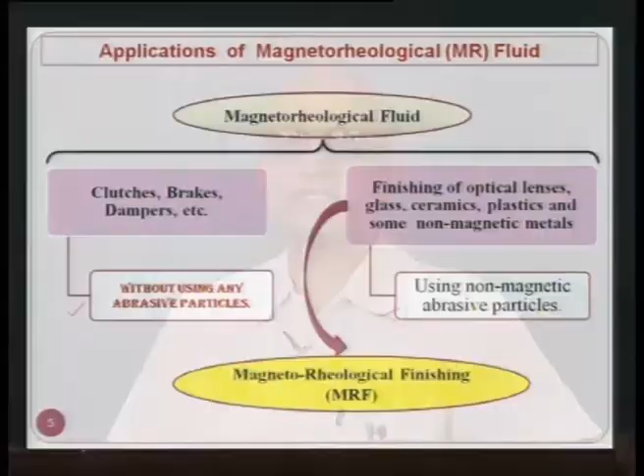The important point to note here is that the fluid does not contain any abrasive particles, but on the right hand side, if you see, this magnetorheological fluid is used for finishing of optical lenses, glass, ceramics, plastics and some non-magnetic metals. Now, important point here to note is that this fluid is using non-magnetic abrasive particles. These particles include alumina Al2O3, silicon carbide SiC, it can be diamond particles also.

But in this particular talk we are going to discuss the application of magnetorheological fluid in the field of finishing, and this process when using magnetorheological fluid along with the abrasive particles, we call it as magnetorheological polishing fluid or MR polishing fluid also. And in this talk I am going to discuss only magnetorheological finishing process, which uses MR polishing fluid as the tool.

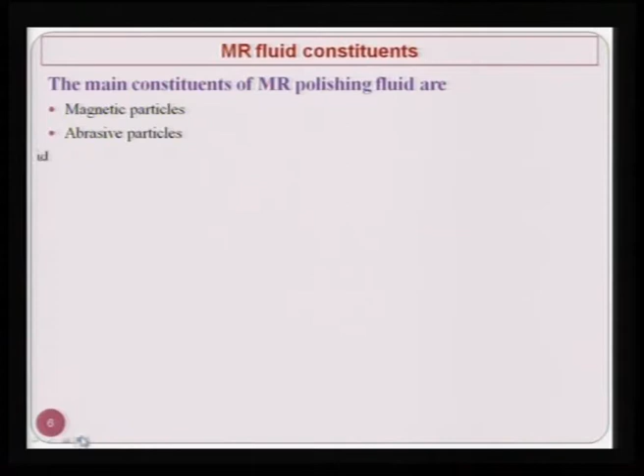The major constituent of any MR polishing fluid is the carrier fluid, and it makes a lot of difference as long as performance of the finishing process is concerned. In case of certain workpiece materials, it is always recommended to use water as the carrier fluid, while in some other cases oil is recommended as the carrier fluid. Now, when you are mixing up magnetic particles and abrasive particles in the carrier fluid, these magnetic particles and abrasive particles will settle down at the bottom because they have higher density compared to the carrier fluid. So, we need what is known as stabilizer, and there are various kinds of stabilizers which are used in magnetorheological polishing fluid. It may be glycerol, grease, oleic acid or xanthan gum. One of these is used depending upon the requirement.

Essential features of MR fluid for magnetorheological finishing process: optimum concentration of magnetic particles and abrasive particles is very important. If the percentage of these two constituents is very high, then definitely the efficiency of the finishing process is going to go down. High yield stress under magnetic field. Here we are applying the magnetic field and the fluid is always subjected to the magnetic field. So, whatever are the properties of MR polishing fluid without the application of magnetic field and with the application of magnetic field are going to be very different from each other.

Low off-state viscosity means the viscosity of the fluid without the application of the magnetic field. Less agglomeration and good redispersibility should be there. The particles should not get agglomerated, otherwise they are going to affect the performance and quality of finishing. And once the magnetic field is no more, then the particles should get dispersed quickly.

And resistance to corrosion, static sedimentation stability, that is the resistance of fluid to forming hard sediment that is difficult to redisperse. That is what I mentioned earlier, that in static conditions they should be stable. That means sedimentation should not take place, otherwise the properties of the fluid are going to change and that will not give the proper finishing.

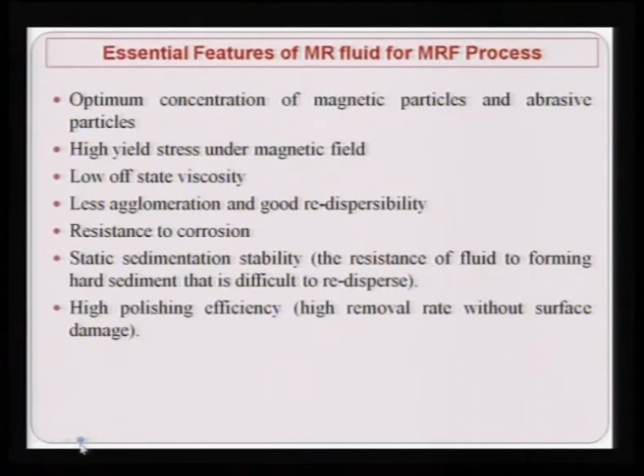High polishing efficiency, that is high removal rate without surface damage. Apart from high material removal rate, we as manufacturing engineers are always concerned with high finishing rate, because in finishing processes, finishing rate is more important than material removal rate. The objective is to achieve the desired surface finish without any defect in the lowest possible time, not to remove a large amount of material, but to achieve the desired surface finish in minimum possible finishing time.

Magnetic particles. Main functions of magnetic particles in the fluid are to form dense chain structure under magnetic field and to hold abrasive particles during the finishing process. This is very important - once the abrasive particles are held by the magnetic particle chains, this acts something like a very soft grinding wheel, in which the bonding material holds the abrasive particle and finishing is done. But once the fluid is out of the magnetic field zone, it will shatter and convert into an easily flowing liquid.

You can see here in the figure there is no magnetic field. White color indicates the alumina, and blackish color indicates the iron particles or carbonyl iron particles, and they are uniformly distributed across the fluid.

But when you apply the magnetic field, the same fluid with the same distribution of iron, abrasive particles, carrier fluid and stabilizer forms chains, as you can see on the right hand side. The abrasive particles are held either within the chains or between the chains, and when there is relative motion between these abrasive particles in the chains and the workpiece surface, the abrasive particles act as a tool and remove material from the peaks of the workpiece surface - that is how you keep getting a better and better surface finish.

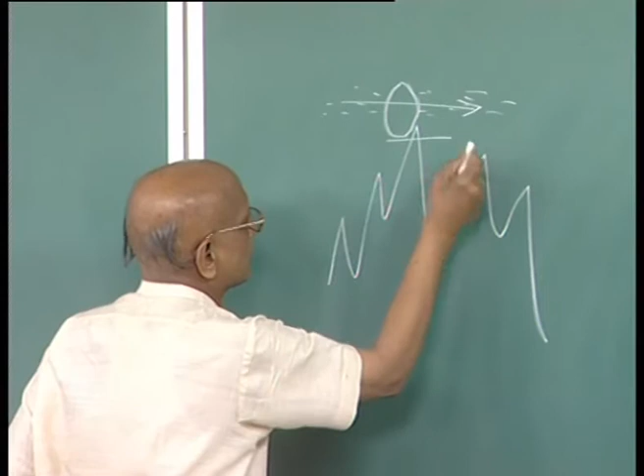I'll show you something like this - this is the abrasive particle which is being held by the fluid chain. There is the chain of iron particles, and this chain is being pushed in this particular direction due to the rotation of the wheel. Then this peak will get removed like this, and the RA value, RMS value will keep decreasing.

Many types of magnetic particles are available for MR fluid preparation. As I mentioned earlier, you can use carbonyl iron particles, although carbonyl iron particles are very expensive, electrolytic iron powder, iron cobalt alloy powder, etc.

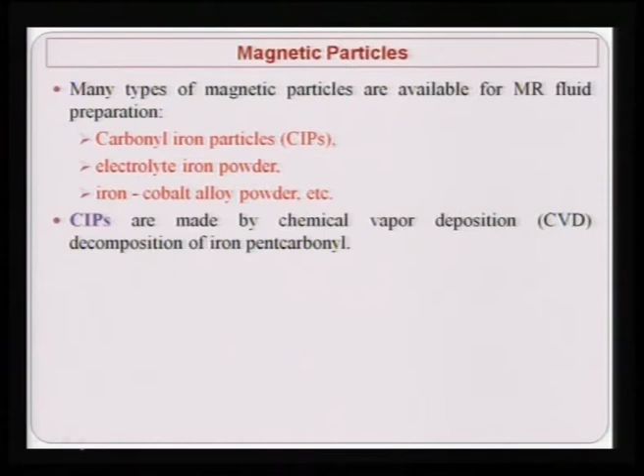CIPs are made by chemical vapor deposition decomposition of iron pentacarbonyl, while electrolytic iron powder is prepared using the electrolytic or spray atomization process. CIPs are more preferable compared to others because they are magnetically soft, chemically pure, and have high saturation magnetization - that is 2.1 Tesla at room temperature, which is really a very high value of saturation compared to the saturation value for any other iron or magnetic particle.

Abrasive particles are non-magnetic materials in MR fluid responsible for material removal, as I mentioned earlier - these are the particles which really remove material from the workpiece, while chains of iron or carbonyl iron particles just act as the bonding material in the grinding wheel, holding these abrasive particles. When there is relative motion between the abrasive particle and the workpiece surface, material is removed in the form of microchips or nanochips depending upon the finishing conditions.

Important parameters are granularity and hardness of these abrasive particles, which make the difference as far as finishing rate is concerned. Commonly used abrasive particles are alumina Al2O3, silicon carbide SiC, cerium oxide CeO2, and diamond powder. Other abrasive particles can also be used depending upon their availability, cost, and the requirement of the process.

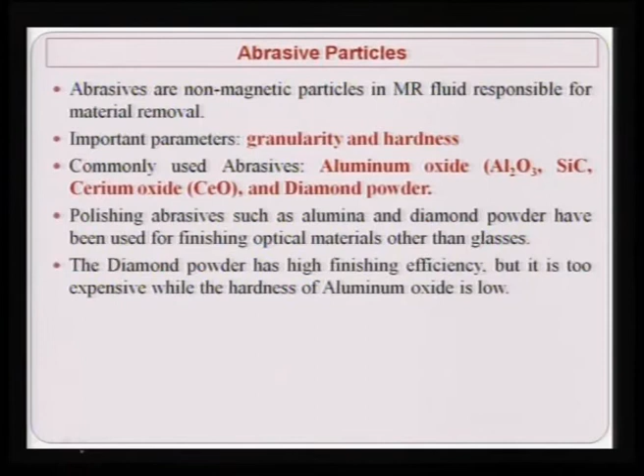Polishing abrasives such as alumina and diamond powder have been used for finishing optical materials other than glasses. Diamond powder has high finishing efficiency, but it is too expensive, while the hardness of aluminum oxide is low. So diamond particles can be used, but they are quite expensive. So one has to see the application, then only diamond should be used as the abrasive particle for finishing purposes.

However, the most commonly used polishing abrasive and carrier liquid combination for magnetic field assisted finishing of all optical glasses, including many crystals, is cerium oxide and water respectively.

The function of the carrier fluid is primarily to provide a medium in which the solid particles like carbonyl iron particles and abrasive particles are suspended.

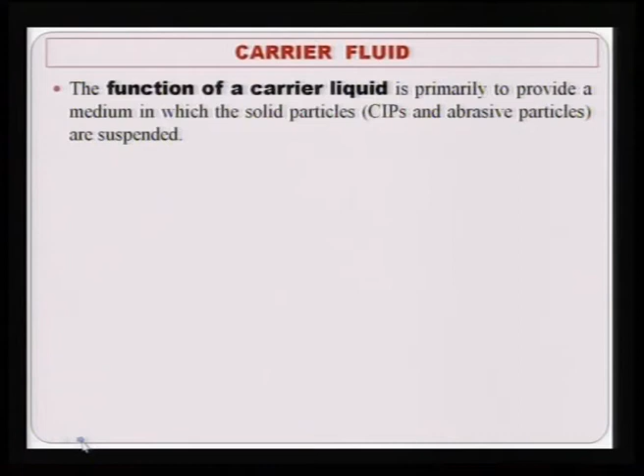The off-state viscosity of MR fluid should be as low as possible, so that it can easily reach areas difficult to reach, because wherever this fluid reaches and wherever there is relative motion between the abrasive particle and the workpiece surface, finishing will take place only in those areas. If the fluid is not able to reach those difficult areas, then no finishing will take place, and you will not get the appropriate finished area as desired.

Important properties of carrier fluid are: it should be non-corrosive with magnetic particles, that is carbonyl iron particles or iron particles, abrasive particles like alumina, silicon carbide, diamond, etc., as well as the components used in the device, that is the machine or MRF machine components material.

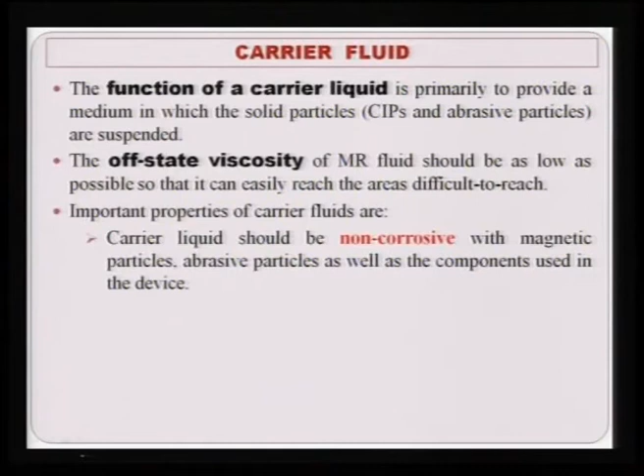Carrier liquid should have high boiling temperature and low freezing point, because heat is generated to some extent, and the carrier fluid should not start boiling, otherwise it will not be able to serve its purpose properly. It should have a low freezing point because in many locations the environmental temperature is low, it should not freeze, otherwise it will not serve the function for which the fluid is to be used.

Carrier liquid should not show significant variation in viscosity with temperature. As the temperature changes, the viscosity of the carrier fluid should not change substantially, otherwise it will not remain in the designed parameter condition, and if it does not remain in the designed parameter condition, then you are not going to get the desired finishing rate and final surface roughness value.

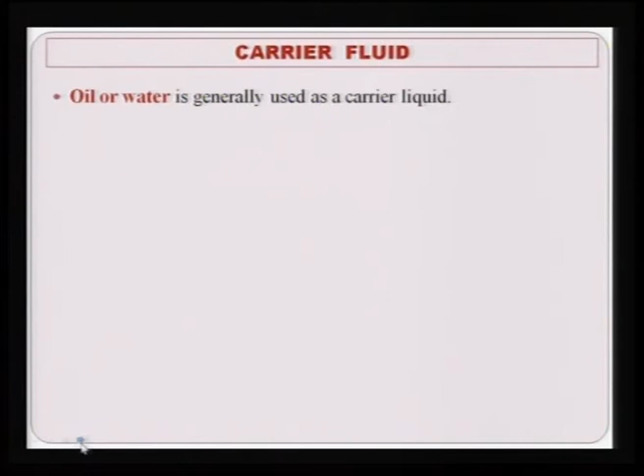Oil or water is generally used as a carrier fluid. Oil-based carrier liquid has high viscosity, so MR fluid has good performance in stability and sedimentation. This simply means that solid particles will not be able to sediment or settle down so easily, because oil has higher viscosity compared to water.

While considering rheological property, water-based MR fluid has high yield stress compared to oil-based liquid. Moreover, water has hydroxylation to glass for improving finishing efficiency. In addition, water imparts cooling during finishing, and the cooling rate in case of water is higher compared to oil.

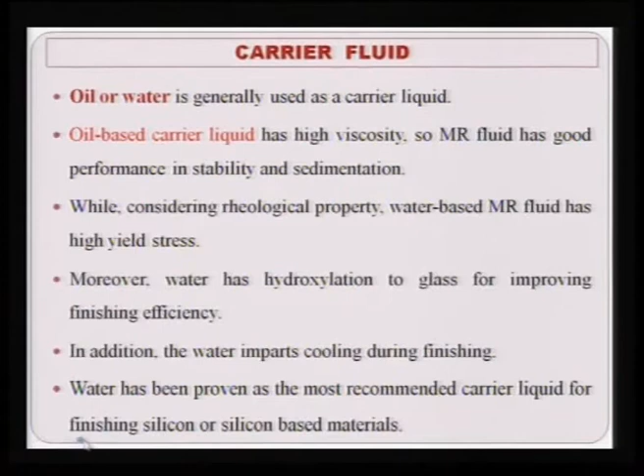Water has been proven as the most recommended carrier liquid for finishing silicon or silicon based materials. Invariably water is used for silicon or silicon based materials for finishing purposes, because it chemically reacts and is able to easily finish ceramics or ceramics based materials with comparatively soft abrasive particles.

Stabilizers: the stabilizer is used to disperse the magnetic particles and abrasive particles uniformly in suspension and to retard oxidation of the magnetic particles and prevent agglomeration, as I have emphasized earlier, so that they do not permit the solid constituents of the MR polishing fluid, that is CIP or carbonyl iron particles and abrasive particles, to clump.

Commonly used stabilizers are glycerol or grease. Stabilizers create a coating on the particles so that MR fluid can easily redisperse. This means the stabilizer tries to minimize the agglomeration of these solid particles or powder so that they can be easily dispersed in the fluid.

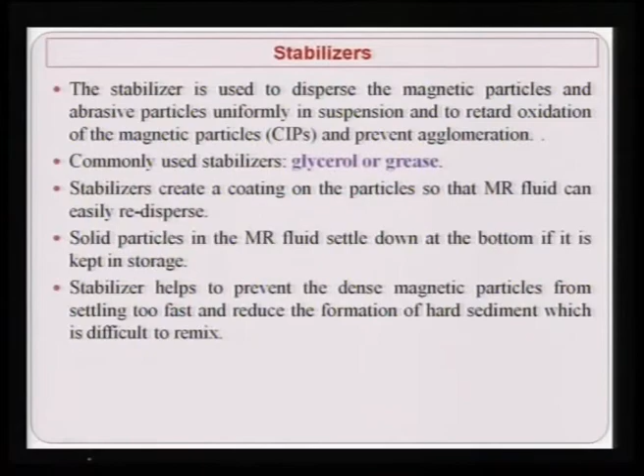Solid particles in the MR fluid settle down at the bottom if kept in storage. The stabilizer has to prevent the dense magnetic particles from settling too fast and reduce the formation of hard sediment, which is difficult to remix, because we do not want hard sediment to form from the magnetic or non-magnetic particles. Otherwise, mixing becomes very difficult, and one should be very careful before using this MR polishing fluid.

It should be properly mixed for a good amount of time, otherwise the performance of the MR polishing will not be as desired. Moreover, the stabilizing agents are also used to impart durability and corrosion resistance.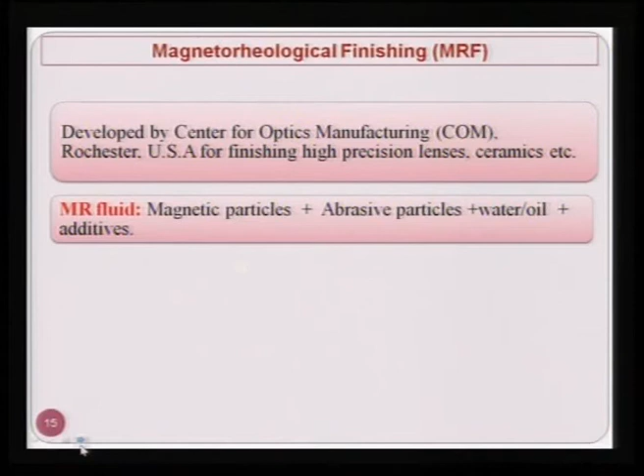MR fluid consists, as I have already mentioned, magnetic particles, abrasive particles, water or oil as the carrier fluid, and additives, specifically the stabilizers. Stiffness of the MR fluid is a function of the magnetic field strength. Higher the field strength, stronger is the chain being formed by the magnetic particles, and the abrasive particles will be held more strongly compared to the case when the magnetic field strength is lower.

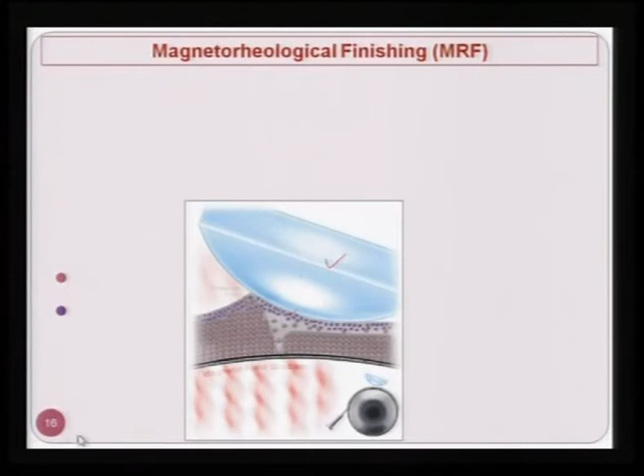If you see this figure, it clearly indicates what is happening on the right side. Here there is the electromagnet and the MR fluid conditioner, and a pump. This pump is pumping the MR polishing fluid to the nozzle. From the nozzle the fluid is being dispersed on the wheel. This is the wheel which is rotating in this particular direction, and this fluid is coming onto it, with the electromagnet providing the magnetic field.

So this fluid forms a ribbon kind of structure on the rotating wheel, and when it comes to the other end there is a suction, and through suction the pump takes in the fluid and it comes to the MR fluid conditioner. In this conditioner you can add some of the constituents of the MR polishing fluid as per requirements.

Now, this is the lens, this lens is rotating and you can move it in one direction as well as another, so that the whole surface of this lens is finished, and you can also rotate the lens at its own axis. The same thing is shown on the left hand side in the figure.

Fluid is extruded onto a rotating wheel in a thin ribbon that contacts the optical surface. You can clearly see here, this is the fluid, and a thin layer is there between the lens and the wheel, being extruded in this particular direction. Because of this, normal force as well as tangential force act on the workpiece surface through the abrasive particles, which remove the material.

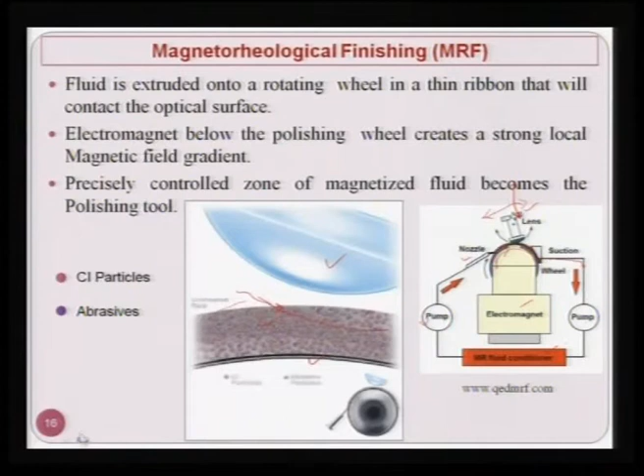Now, lapping and chemical mechanical polishing, we know these are very good processes extensively used in the computer industry, especially for computer components, and they give very good surface finish, but the rejection rate is quite large in case of CMP. As you can see here, the load is acting, here is the pad, and here is the abrasive particle which is finishing the workpiece surface. In this case, an abrasive particle is embedded in the rigid pad which supports the particle load.

The normal force, somewhere around 0.01 Newton, is significant enough to cause surface indentation and scratching, meaning it damages the surface of the workpiece. Although the normal force looks quite low, the size of the abrasive particle is also very low, being micron sized, so the stresses acting on the workpiece surface are quite large, and this leads to damage to the surface of the workpiece. That is why the rejection rate in case of CMP is quite high.

But if you see the MR polishing phenomena, here the workpiece is in contact with the abrasive particles, but the abrasive particle is not in contact with any solid support; rather it is part of the MR fluid, and the force being applied on the abrasive particle is through hydrostatic pressure and magnetic buoyant force.

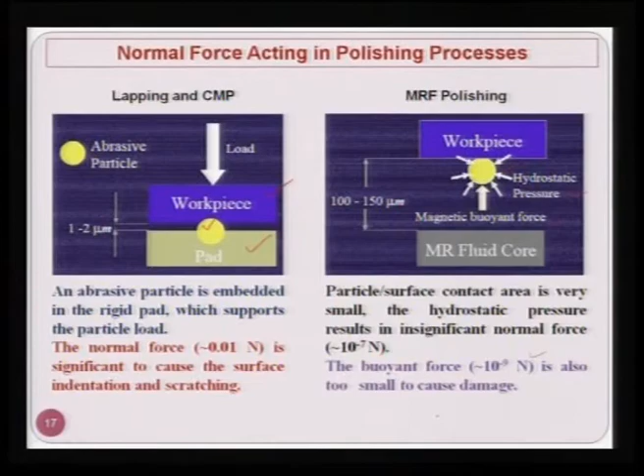So, there is a significant difference in the magnitude of the force acting on the workpiece surface through the abrasive particles. The buoyant force, which is another constituent of the normal force in the MR finishing process, or magnetorheological fluid polishing process, is 10 raised to minus 9, which is still smaller than the hydrostatic pressure, and is also too small to cause damage. That is why in the magnetorheological finishing process, the workpiece surface damage is more or less absent, and it is reasonably high in chemo-mechanical polishing as well as lapping processes, which is quite evident from this particular slide.

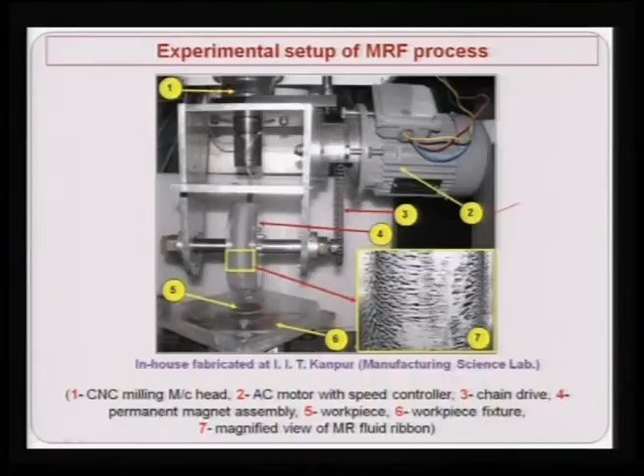Five is the workpiece that is shown over here, six is the workpiece fixture, and seven is the magnified view of the MR fluid ribbon. The ribbon that is being formed over here is magnified, and as you can see here, these are the brushes. These brushes are being formed, and their strength depends upon the magnetic field strength, and these brushes have abrasive particles outside, as we have seen in the video film. When these abrasive particles come in contact with the workpiece surface over here, they remove the peaks one by one, and the finishing keeps on improving, and you can easily get a surface finish of less than 10 nanometer in this particular case.

How the forces are acting, as you can see over here, the fluid flow direction is shown in this particular direction, and the magnetic field direction is in this particular direction. Now, as I mentioned earlier, two types of forces are acting on the abrasive particle, that is the yellow color here. One is the normal force and another is the tangential or axial force. Now, this is the peak of the workpiece surface. The normal force is responsible for the penetration of the abrasive particle into the workpiece surface, and the tangential force is responsible for removing the material from the workpiece surface in the form of a microchip. So, you can see here, this is the size of the microchip going to be removed, and the size of this microchip will depend upon the normal force acting, and if the tangential force is sufficient to remove that indented material, then it is going to give you the chip.

Two types of forces act in the MRF process, as I have just explained to you. One is the normal force Fn, and this is due to the squeezing of the MR fluid through the converging gap, and the magnetic levitation force due to the magnetic particles. The other is the tangential force. This force is due to the rotation of the carrier wheel. Process parameters of the MRF process.

Now, before I proceed, let me explain what the squeezing force is. In the case of the MRF process, you have seen that there is a wheel which carries a ribbon, and this ribbon is nothing but the MR polishing fluid consisting of abrasive particles and iron particles. If you see the enlarged view of this, as you have seen in the video film, it is like this. These are the abrasive particles, while all the others are the magnetic particles over there, and these abrasive particles are going to come in contact with the workpiece surface.

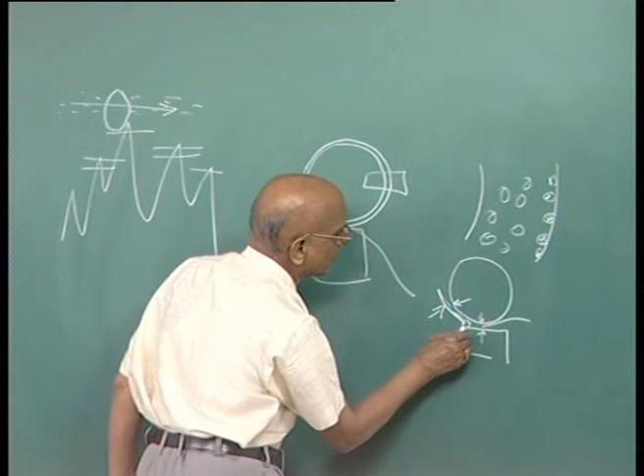Now, if you see the enlarged view of this, it is like this. This is the wheel, this is the workpiece surface, and when this is there, then what happens is that this thickness is greater than the thickness over here. So, this squeezing will take place, the fluid will be squeezed all over here, and then it will be moving like this. When this squeezing takes place over here, it creates additional normal force on the abrasive particles. Process parameters of the magnetorheological finishing process.

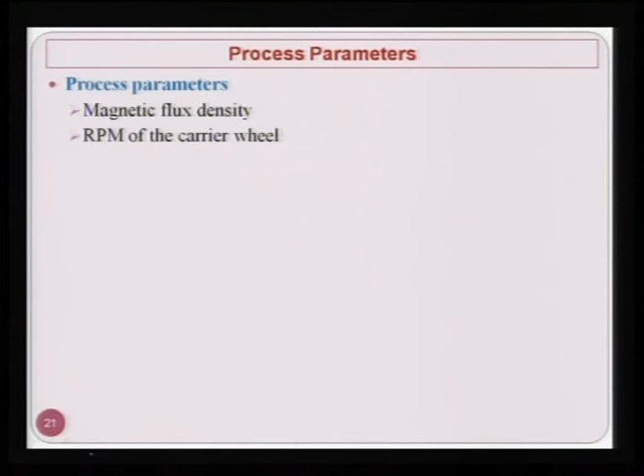Magnetic flux density is one of the very important process parameters. RPM, revolutions per minute of the carrier wheel, or indirectly the surface speed of the carrier wheel, makes the difference. Flow rate of the MR fluid, volume fraction of the carbonyl iron particles and abrasive particles, size of the carbonyl iron particles and abrasive particles, feed rate of the workpiece, that decides the relative velocity between the abrasive particle and the workpiece.

And type of the workpiece material. Now, there are certain parameters which depend on these finishing parameters, and these parameters include material removal rate, or these are also known as responses, which are going to decide the performance of the finishing process.

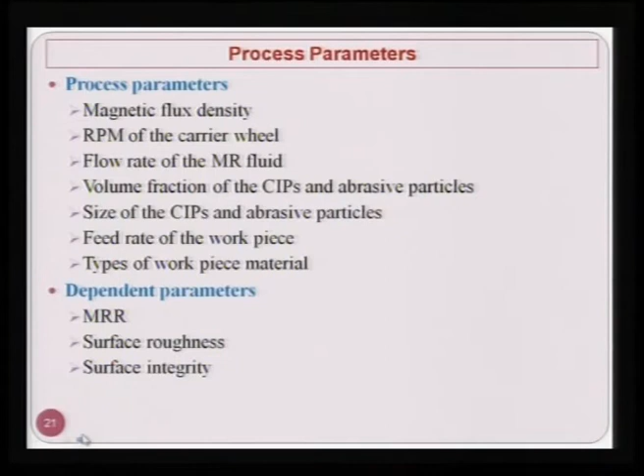Surface roughness, surface integrity, and one thing which I will like to mention here, apart from this, quite important, is the finishing rate in this particular case, and this finishing rate will have the unit as the removal of this peak in terms of micrometer or nanometer per unit time. So, it can have micrometer per second or nanometer per second.

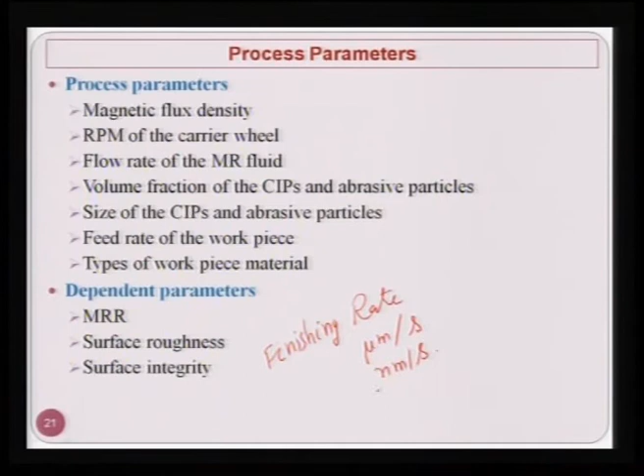Now, what is the effect of abrasive particles? Concentration of abrasive particles significantly changes the finishing mechanism. At low concentration of abrasive particles, you can see here particles are dispersed at different locations.

Some of the locations are without abrasive particles, some of the locations are with abrasive particles, and material will be removed by these abrasive particles only and not by the carbonyl iron particles. A few abrasives are trapped in the CIP chain structure, less discontinuous chains of CIPs are formed. Hence, CIP chains are capable to grip abrasive particles firmly during finishing process.

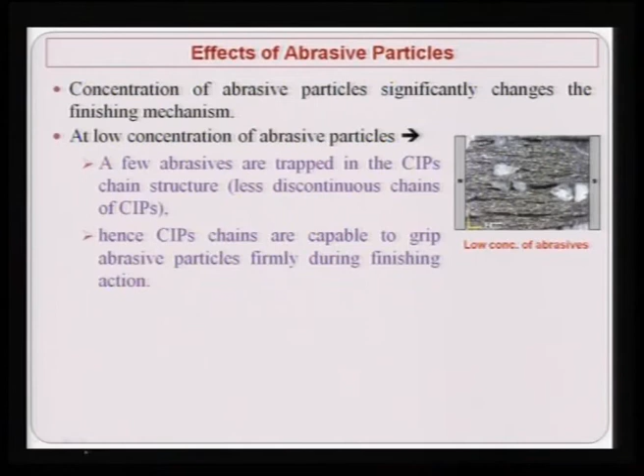Now, when you have high concentration of abrasive particles, you can see the picture over here. So many abrasive particles get agglomerated and they are at one particular location, and this feature, if it is too high, may not be desirable, because this may lead to deep scratches and non-uniform finishing along the surface of the workpiece. At higher abrasive particle concentration, more amount of abrasives are entangled in between CIP chains, as you can see over here, and they reduce the strength of the fluid under shear flow.

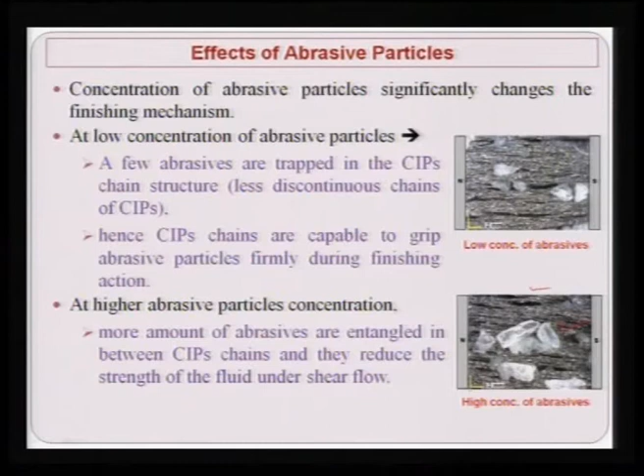Concentration of solid particles. It is also observed that total solid particles, that is magnetic particles and abrasive particles, concentration should not exceed 45 to 50% by volume in MR fluid.

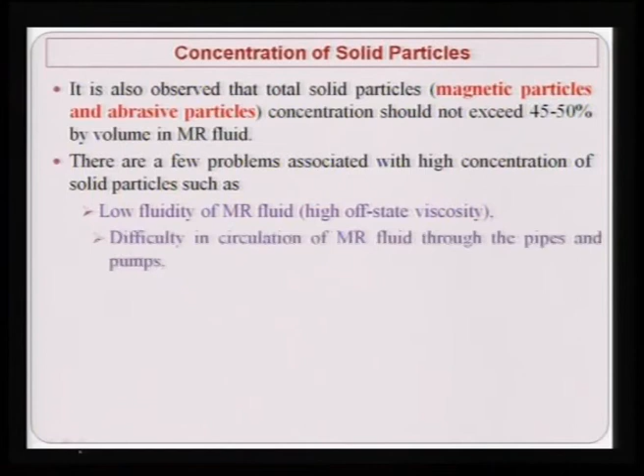There are a few problems associated with high concentration of solid particles, such as low fluidity of MR fluid, high off state viscosity, and if high off state viscosity is there, it will not be able to reach difficult to reach areas, and you may not get proper finishing, especially in case of complex shaped component. Difficulty in circulation of MR fluid through the pipes and pumps. Difficult to remix the MR fluid because low dispersibility is there.

Now, what is the effect of working gap? That is the gap between the lowermost level of the ribbon and the surface of the workpiece, that is known as working gap, as you can see over here. Suppose this is the wheel and say this is the ribbon and here is the workpiece. Then the gap between the lowermost part of the ribbon and the top surface of the workpiece or the surface which is being finished, that is known as working gap.

Now, you can see here in this particular figure the distance from the center of the magnet. Suppose this here is the magnet. So, this is the center of the magnet, then on one side it is negative, left side it is negative, right side it is positive. So, it shows distance from the center of the magnet and magnetic flux density. You can clearly see that as the distance is increasing, the magnetic flux density is decreasing, which is obvious. So, it shows variation of magnetic flux density in the working gap, and y is the working gap in millimeter, and that is this particular y axis.

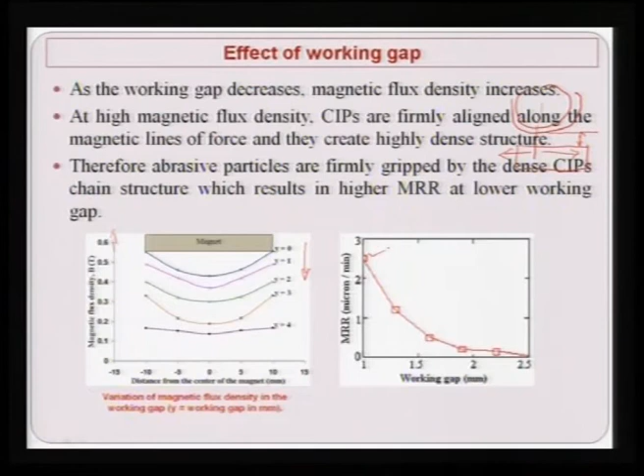As the working gap decreases, magnetic flux density increases, as shown here. At high magnetic flux density, the CIPs are firmly aligned along the magnetic lines of force, and they create a highly dense structure. Therefore, abrasive particles are firmly gripped by the dense CIP chain structure, which results in higher MRR at lower working gap, as seen at the top or left side of the figure on the right.

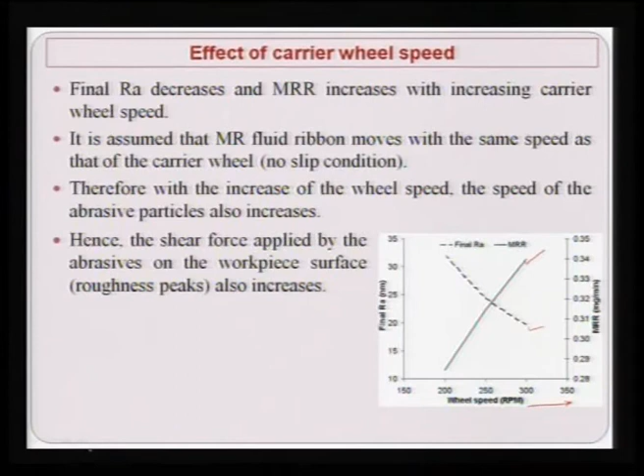It is assumed that the MR fluid ribbon moves at the same speed as the carrier wheel, that is, there is no slip condition between the wheel and the fluid ribbon. Therefore, with increase of wheel speed, the speed of the abrasive particles also increases. Hence, the shear force applied by the abrasives on the workpiece surface also increases.

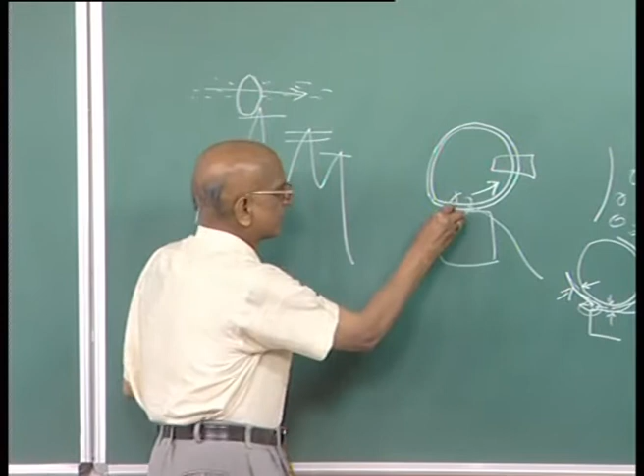As the RPM of the wheel increases, the surface speed of the wheel's outer periphery increases, and if the surface speed of the outer periphery increases, then whatever abrasive particle is there, its speed with respect to the workpiece will also increase. This is very similar to a higher cutting speed in conventional metal cutting, and that is why you get a higher material removal rate.

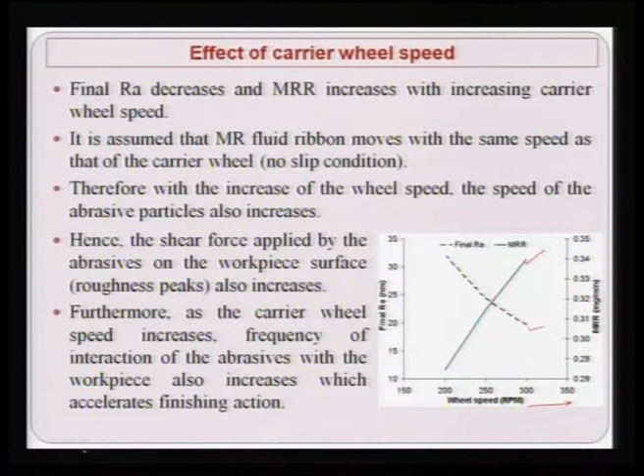Furthermore, as the carrier wheel speed increases, the frequency of interaction of the abrasive with the workpiece also increases, which accelerates the finishing action, which is very simple to understand.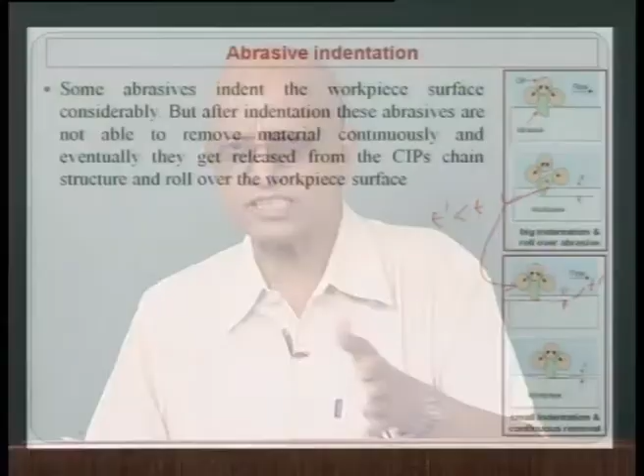If you compare this point to this one, the depth of penetration has decreased compared to the earlier case, T. This becomes the depth of penetration T dash, which is smaller than T. Since T dash has decreased, the total tangential force required to remove material in the form of a microchip will be reduced, and once this becomes equal to, or the force applied by the fluid on the abrasive particle becomes greater than, the resistance of the workpiece material to remove thickness T dash, then finishing will start. As seen in the last figure, this is able to remove a smaller depth of workpiece material.

In case of shallow indentation, less force is required to remove material, so abrasives continuously remove material, as seen in the last figure on the right. For the finishing process, a small depth of indentation is favorable to reduce or avoid deep scratches on the final finished surface, as compared to high depth of indentation shown in figure 1 on the right. So it is always desirable to have a smaller depth of indentation, meaning a smaller force compared to the larger normal force.

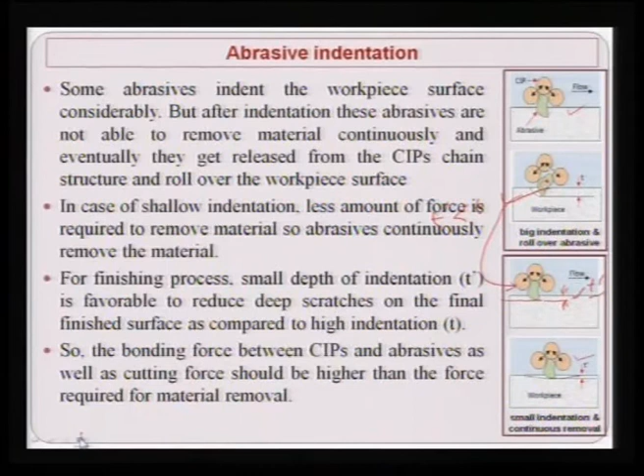Now let us see some of the applications of the magnetorheological finishing process.

This is the surface which was obtained initially, silicon single crystal, and you can see the surface finish was 1.26 micron, with peaks and valleys in the top surface. Then this was finished by the MRF process developed here, and the final surface finish achieved is 8 nanometers.

You can see the difference between the surf analyzer plots over here and here. This clearly indicates very good surface finish after the MRF process, and this can be clearly seen by the AFM plots as well.

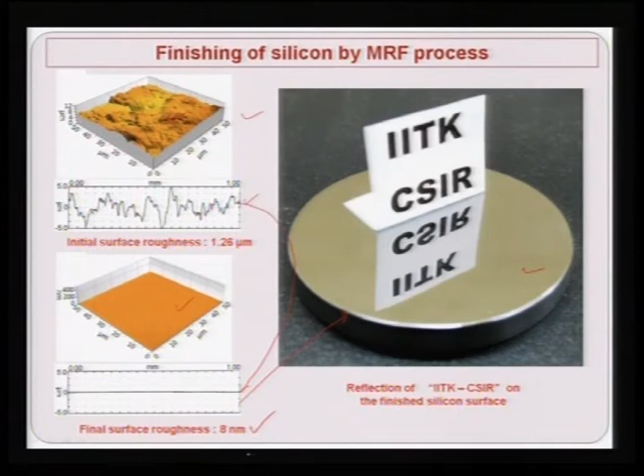Just to demonstrate it, this is the finished surface with 8 nanometer surface finish, and we wrote on a piece of paper 'IITK CSIR', and you can clearly see the reflection of these letters on the finished silicon surface.

Here, MRF quilt pattern removal: you can see the initial surface before finishing and the difference between this surface and the finished surface. Flatness is clearly visible. RMS values are also very different: here 1070 nanometer RMS, while in the finished surface it is only 17 nanometer.

Another example, silicon sphere overall figure improvement, can be clearly seen here. This is the initial surface and this is the final surface. The flatness is very clearly visible, and the RMS value has come down from 120.8 nanometer to 10.87 nanometer in 135 minutes, that is approximately 2 hours.

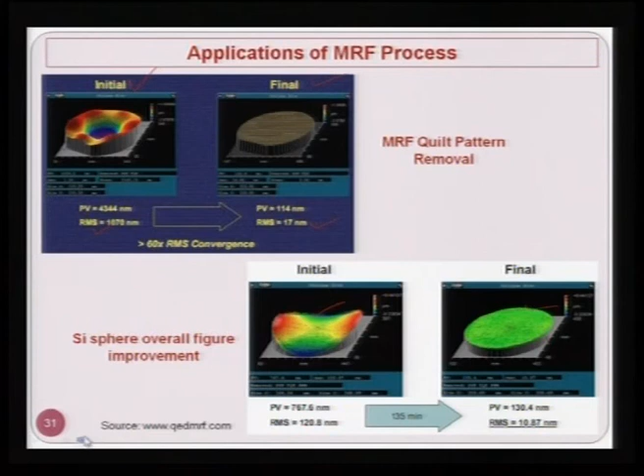This has been taken from this particular source. Now, various other applications are shown here.

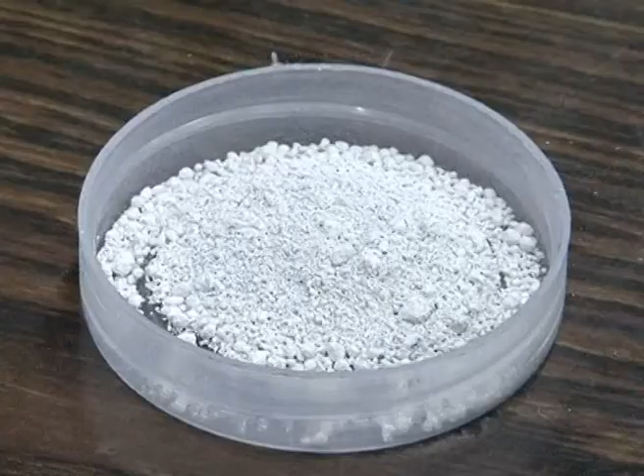Abrasive particles are required to increase material removal, in other words, to reduce finishing time. In the present case, the abrasive is aluminum oxide.

Carbonyl iron particles, in other words magnetic particles, are required to make the MR fluid stiffen under the effect of magnetic field. When the magnetic field is applied, iron particles align along the lines of the magnetic field and create a dense structure. Water is required to provide a liquid medium so that magnetic particles as well as abrasive particles disperse uniformly.

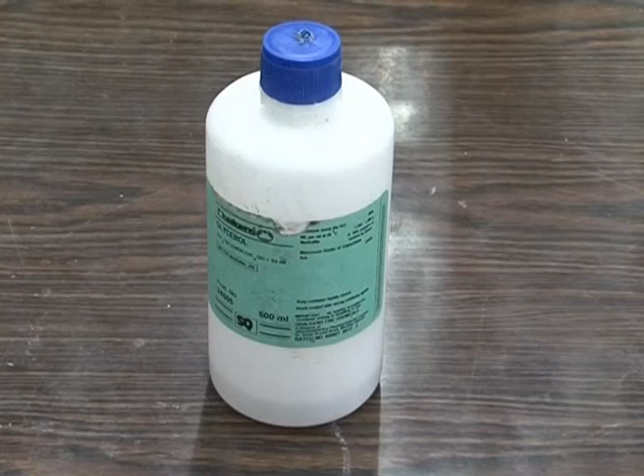Some additives are also required in the MR fluid so that magnetic particles as well as abrasive particles remain suspended in the fluid and to reduce the sedimentation problem. In the present case, it is glycerol.

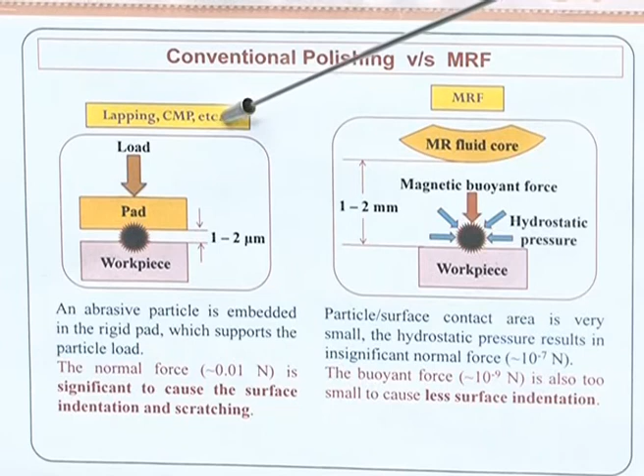This diagram shows the forces acting in conventional polishing versus MRF. In conventional polishing such as lapping or chemical mechanical polishing, shortly called CMP process, the abrasive particle is embedded in the rigid pad which supports the particle load. Therefore, the normal load around 0.01 Newton is significant to cause surface indentation or scratching in case of nano finishing.

While in the other case, in the MRF process, the particle surface contact area is very small so that the hydrostatic pressure results in an insignificant normal force around 10 to the power minus 7 Newton. Furthermore, the buoyant force is also around 10 to the power minus 9 Newton, too small to cause surface indentation in the MRF process. So from this comparative view, you can see that the MRF process is far better than conventional polishing in case of nano finishing of different components.

All the constituents such as magnetic particle, abrasive particle, water and glycerol are mixed together in a proper concentration. After adding all these constituents, it is stirred for at least 1 hour to get it mixed homogeneously.

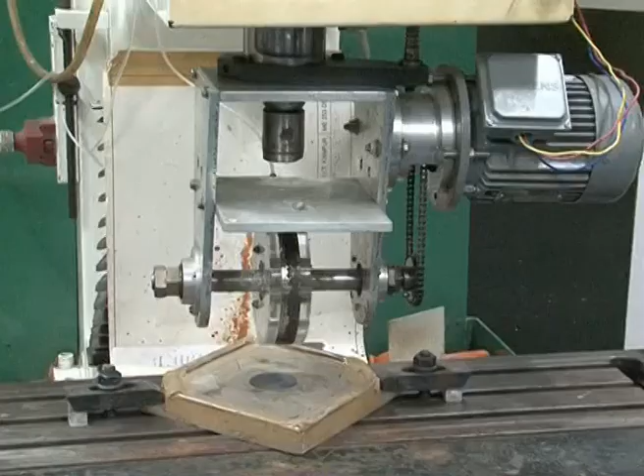The whole setup is connected to the Z axis of the CNC milling machine so that the working gap can be adjusted by computer control. You can control X, Y and Z movement simultaneously by giving the motion.

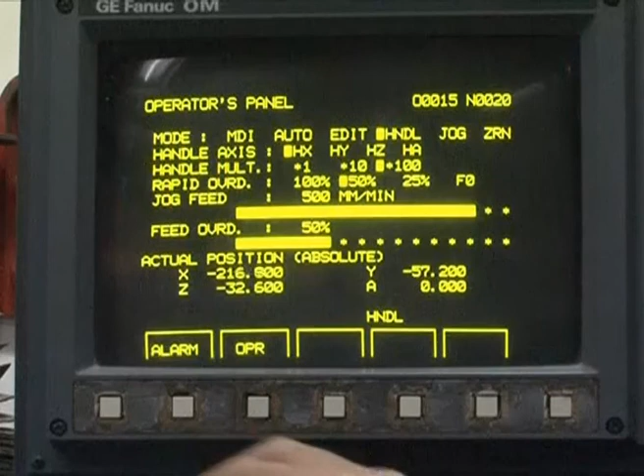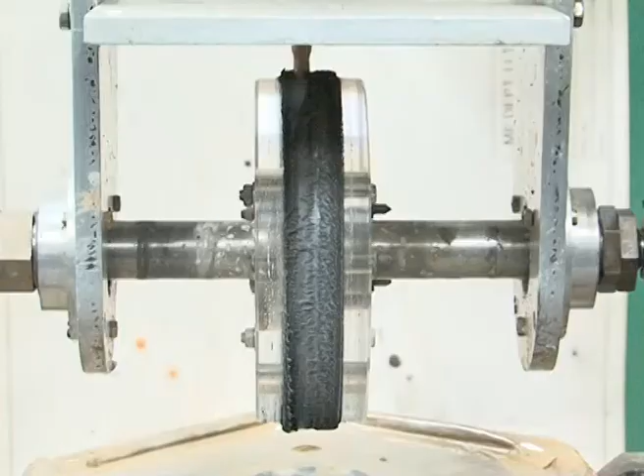Now MR fluid is applied on the carrier wheel. Now you can see the MR particles or magnetic particles are aligned from the north pole to the south pole on the magnet. You can clearly see the chain structure of the MR fluid particles.

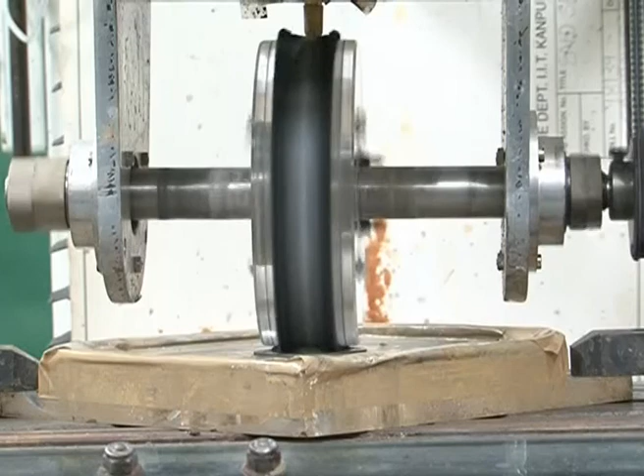After that, a particular gap is set between the workpiece and the carrier wheel by changing the Z-axis position. Once the gap is fixed, rotation is given to the carrier wheel. X and Y movement can also be given to the carrier wheel so that the whole workpiece surface can be covered.

Here you can see the stiffened MR fluid interacting with the workpiece surface. At the finishing zone, two types of forces are exerted on the workpiece surface. One is the tangential force, applied by the rotation of the carrier wheel, and the other is the normal force, due to flow of stiffened MR fluid through the converging gap, because the gap is a little bit smaller than the thickness of the ribbon applied on the wheel, and the hydrodynamic action of the MR fluid also creates some normal force. This process continues till the desired surface finish is achieved.